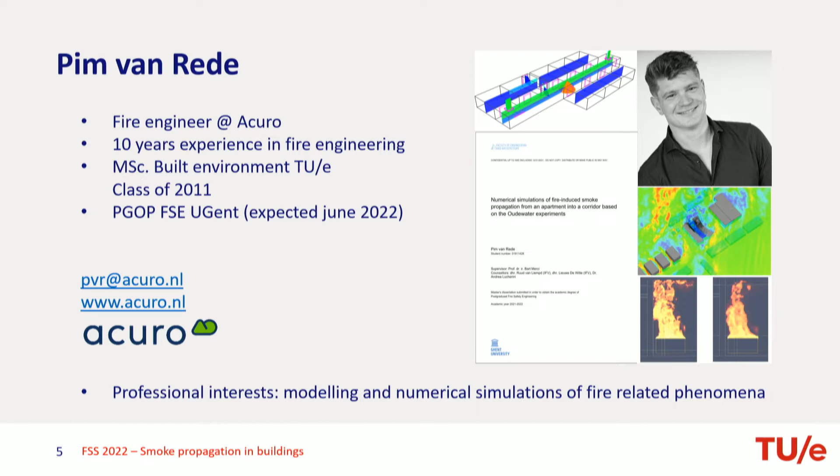Maybe you then, Pim? Yeah, thank you, Ruud. My name is Pim van Rede. I'm a fire engineer at Acuro. Acuro is an engineering company located here in Holland, doing work most notably on fire engineering projects. Well, while we use the layout of the University of Technology, I am not affiliated with the university, other than that I got my master's in the built environment almost 11 years ago.

Currently, I'm finishing the postgraduate program in Ghent with, amongst others, Professor Merci. And Andrea is located somewhere in the back, Andrea Lucherini, you heard him talk yesterday. My thesis is on the numerical simulations of fire-induced smoke propagation, and it uses an experimental data set which was obtained in 2019 by the IFV, now the NIPV, the Fire Institute where we're located right now. My professional interests are the modeling and numerical simulations of fire-related phenomena, and you can contact me at this address.

Well, I think your thesis from the postgraduate course is part of this presentation. Yeah, and you use the same experiments that a student of mine, a master's student, used, also modeling experiments in simulation, but you used CFD simulations, FDS, fire dynamic simulator, and my student used CFAST and B-risk simulations, so zone modeling. And well, Pim said to me, well, zone modeling, that is a kind of generation gap. Because I'm much older, I still believe in zone modeling, and according to Pim, well, we have a discussion about that, I think, later on.

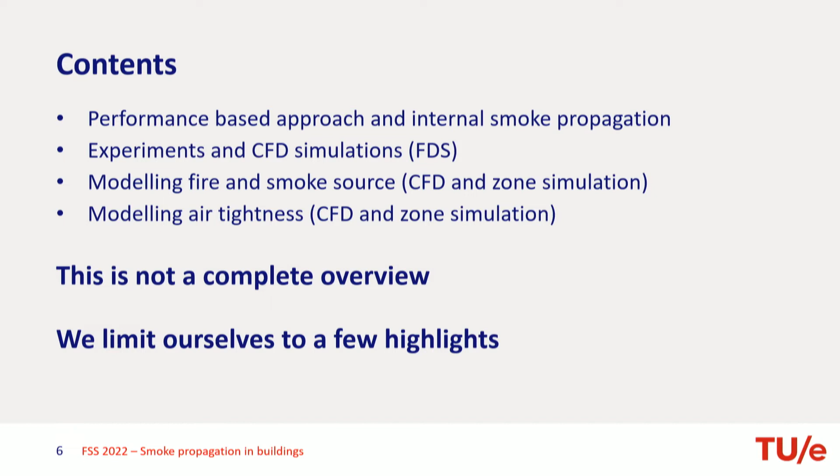So a performance-based approach is always a project-specific approach. That's why if you do a simulation of an experiment, you can fit it for that experiment, but can you also translate that for other configurations? That's always difficult because you are always project-specific.

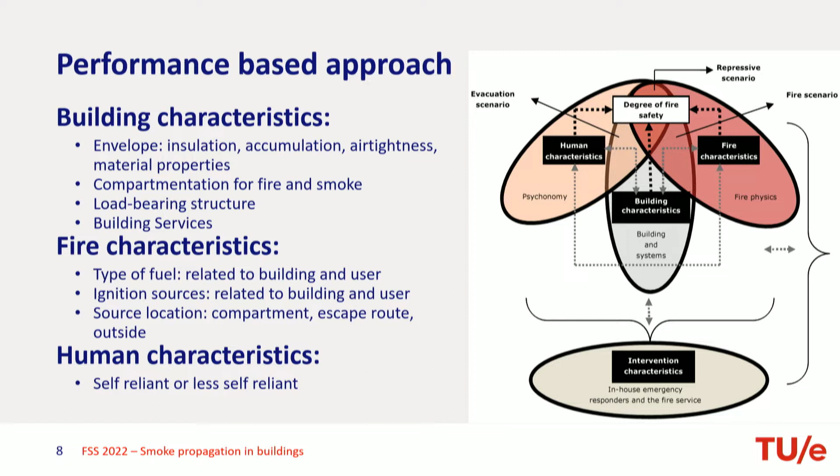Human characteristics are changing nowadays, especially in residential buildings. I think that goes for the whole of Western Europe, but especially in Holland, we have an aging population, and that means that it's not always possible that people evacuate by themselves, although we expect that they do that.

According to the building code, we have an evacuation concept. But does it then really make sense? So that's also an interesting question when you take into account smoke propagation inside buildings.

Main objectives of most building codes have to do with personal safety: safety of the building users, safety of the building assistants, the fire service, and the safety of third-party properties, so the adjacent buildings, adjacent plots. And in all building codes you also find requirements on compartmentation, sometimes on smoke compartmentation, on escape routes, etc., on structural safety.

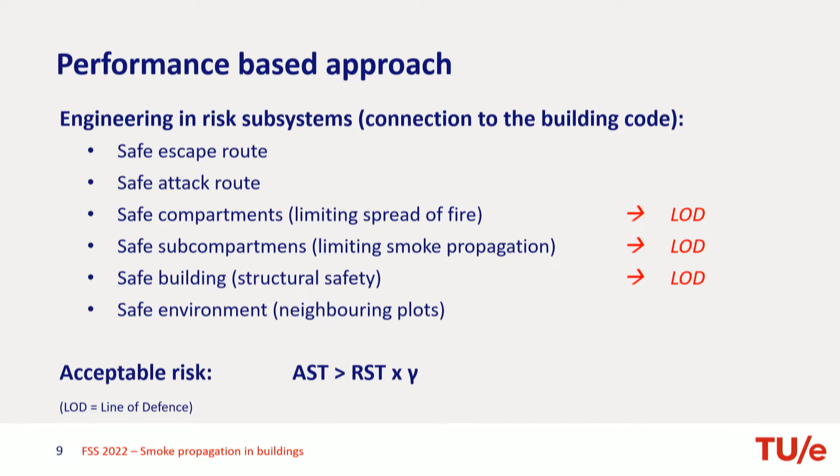So you could think, okay, there's also something about damage control, because we try to limit the maximum fire spread, we try to limit the smoke propagation. That's true, we try to limit that, but it's not - it has nothing to do with damage control. It's just to gain time for the building occupants to act, and to gain time for the fire service to act, to do something.

So none of them is absolutely reliable, but those what I call lines of defense are maybe less reliable than, let's say, the safe escape routes, safe attack routes, and safe environment, which are directly related to the main objectives of the building code.

So in all cases, the acceptable risk you can define as the available safe time has to exceed the required safe time. Sometimes we mean clock time - when it comes to evacuation, we mean clock time, real time. And sometimes it's time according to the standard fire curve, so that's not real time, but it's a kind of thermal load, thermal action.

The larger the interval is, the larger the safety factor is, the more reliable that risk subsystem is. So I like to think in those risk subsystems.

And you see that limiting smoke propagation is also one of the risk subsystems. And I think if you evacuate the building, then after some time, smoke propagation is not an issue anymore. If everyone is out, it's not an issue. But evacuation is the concept of the building code - I think in most countries you can say that that's the concept of the building code.

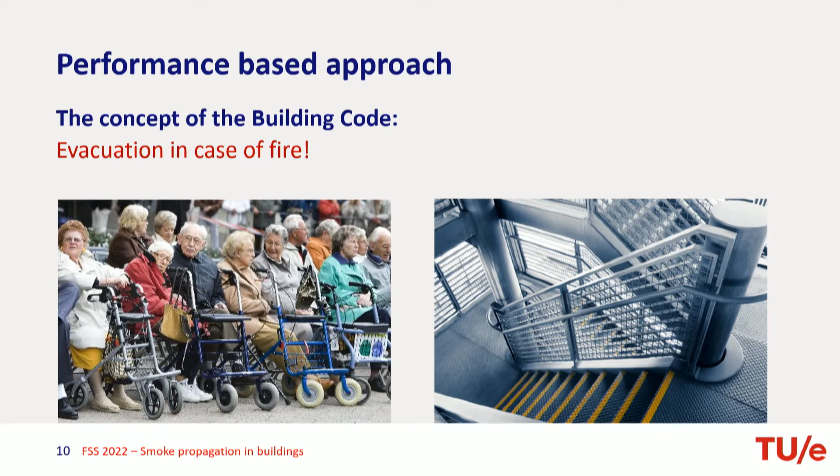But if the left picture represents the building residents, and the right picture is the escape route, it's a kind of misfit. So you have a safe building on paper - according to the building code, it's safe, according to the requirements, it's safe. But in practice, it's not safe because people can't use the evacuation routes.

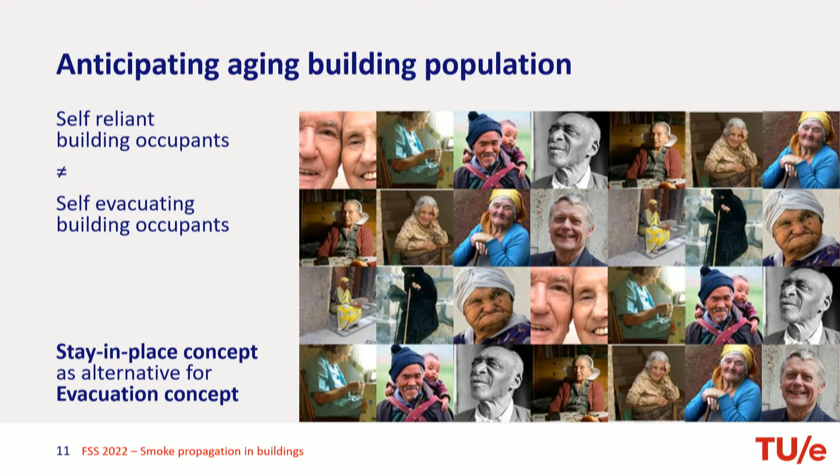So another concept could be: stay in a safe compartment, a stay-in-place concept for non-self-evacuating building occupants. And then smoke propagation becomes even more important, because keeping a safe compartment safe during a whole natural fire - that's really a hard job, a tough job.

So in the evacuation concept, we try to prevent smoke propagation to the escape route - not for the whole natural fire, but let's say 30 minutes or something like that, when everyone is out of the building, it's not important anymore.

And in the stay-in-place concept, then you want to prevent smoke propagation to adjacent compartments, other compartments in the building, but during the whole natural fire. So that might take an hour, might take 90 minutes, something like that.

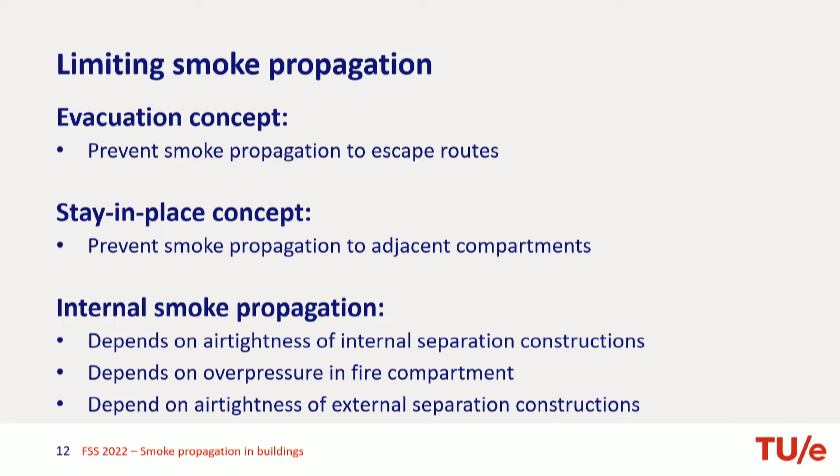And that's very difficult, and also very difficult to predict, because it depends on air tightness, on internal separation constructions, but it also depends on the overpressure in a fire compartment, or a room in a fire compartment. And it also depends on the air tightness of external separation constructions. And the last one, we have requirements on that because of the energy performance of buildings - we need airtight buildings, because if not, they are not energy efficient.

Okay, this is, I think, also not new for you. Evacuation concept: we compare the available safe egress time, ASET, with the required safe egress time, RSET, and a safety factor.

In the stay-in-place concept, you do basically the same, comparing the available safe time with the required safe time, but here the required safe time is the total duration of a natural fire curve, NFC. Because you don't evacuate, people stay in a compartment that is assumed to be safe.

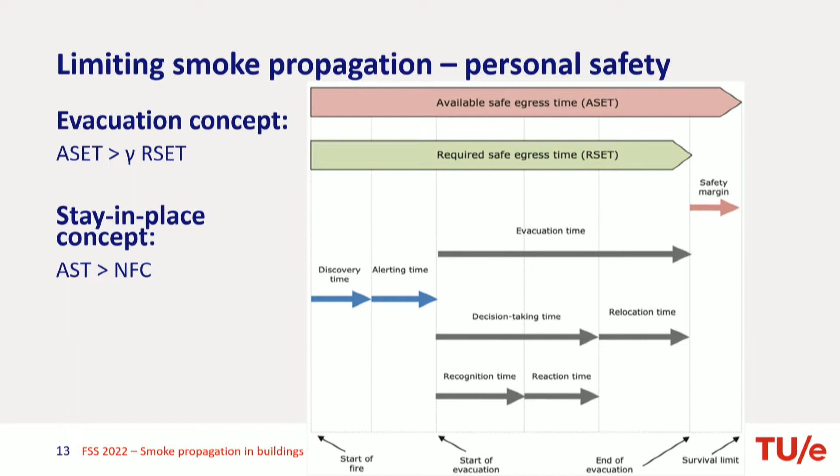It's very difficult to reach, but I think in theory it's a nice concept. And what is safe depends on your assessment criteria, of course.

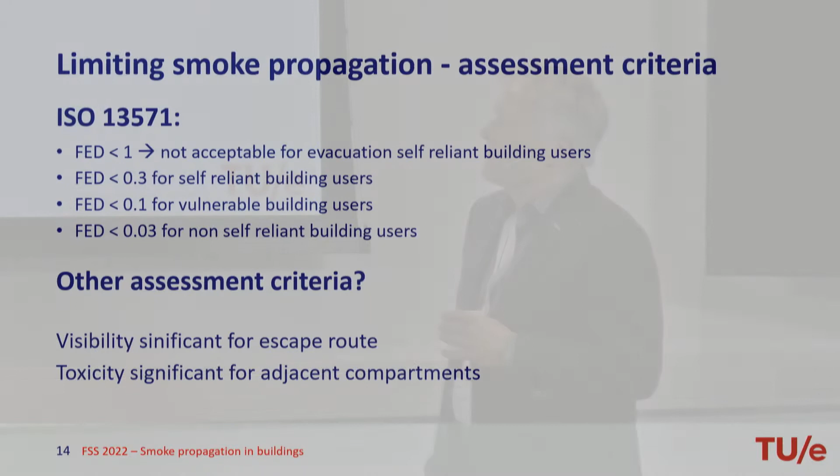You can use several assessment criteria. Here you find ISO 13571, and FED stands for fractional effective dose. There's also fractional effective concentration. A FED value of 1 means that about 50% of the building occupants are not able to move anymore.

So if there is no rescue, then they die. That's never acceptable for an evacuation concept, because people have to move themselves. You have to evacuate yourself.

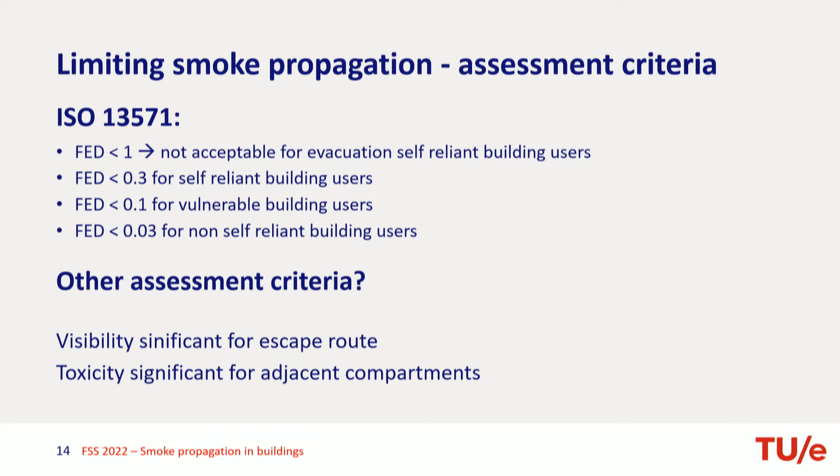So a FED value of 0.3, with a failure probability of about 18%, 0.18, could be more realistic for the evacuation concept.

And if you have vulnerable building users, or vulnerable and non-self-reliant building users, you could be even more strict in your assessment criteria.

In those FED values is toxicity, but also visibility, temperature, everything you think is important, you can fit into those FED values. Visibility is especially important for the escape route.

Toxicity is especially important when you use a stay-in-place concept and want to know if the conditions in adjacent compartments are still acceptable.

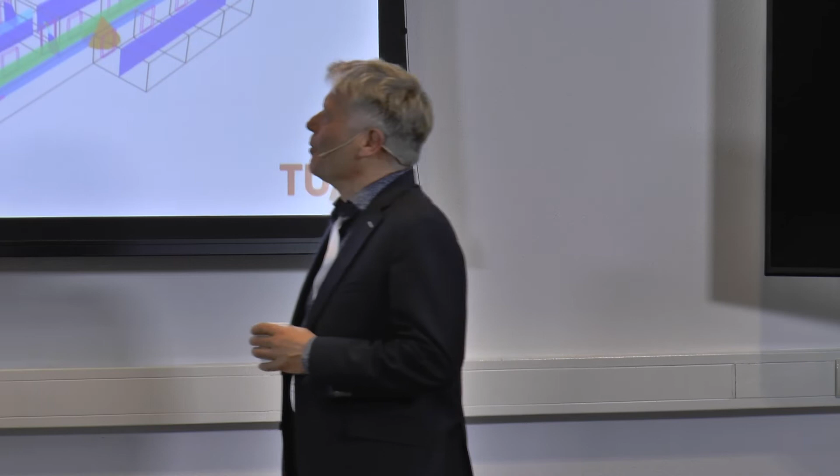This is more difficult to say, but this is 3 layers, and a corridor, and at one side you see also different compartments. So this is how a zone model looks like.

You are modeling connections between the zones, some real openings, doors that can be open, or windows in external separation constructions that can be open.

In both cases here you see where the fire is located. It's a localized fire, so there is no flashover yet. That means that openings in external separation constructions, daylight openings, are assumed to be intact, so there are only a few openings.

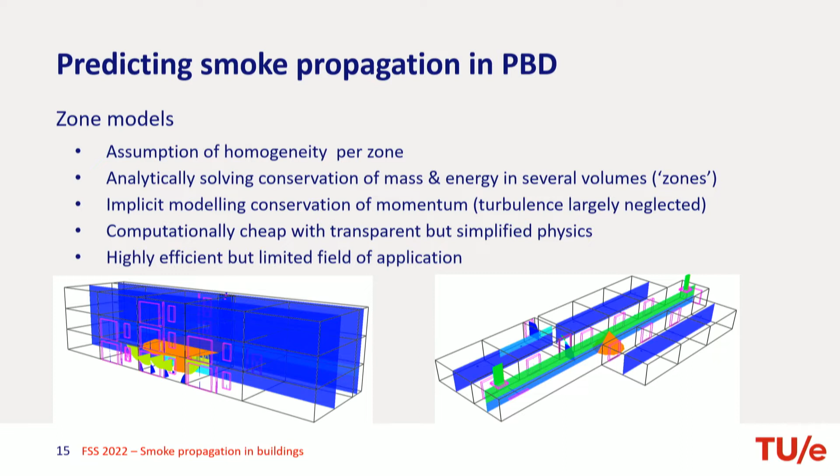Then you can calculate or simulate the smoke spread in that building. Characteristic for zone models is that you assume every zone is uniform, a homogeneous mix of temperature and pollution.

So sometimes you can model one room in two zones, a hot zone and a cold zone underneath. Sometimes it's mixed. If there's very little temperature difference, then maybe it's better to use a mixed situation.

That's a very simple approach. Of course it's not homogeneous, but that's an assumption for calculating average conditions, which could be okay if your zone is not too large.

It's computationally very fast and cheap, and you can perform a sensitivity analysis very easily because calculation times are less than a minute. You can wait for the answer. So from that perspective it's very efficient, but it has a limited field of application.

So one step more advanced is field modeling, computational fluid dynamics, CFD. Here you see a short clip, and you see this is more dynamic.

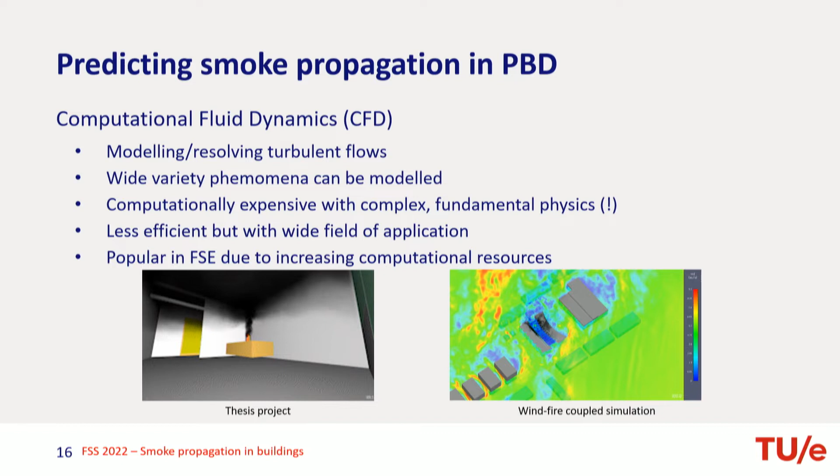This is more advanced, more accurate, and it has gained popularity due to increasing computational resources. Less efficient, meaning you need more calculation time, and performing a sensitivity analysis with CFD is almost impossible. But it has a wide field of application.

Then we have two statements that I started with. It looks like a generation gap, but in my opinion it's still possible to use zone models instead of CFD models. You could say it's better to use zone models because you need fewer boundary conditions and therefore fewer uncertainties.

So maybe a simple model is more reliable than an advanced model where you need a lot of boundary conditions with a lot of uncertainties. Results of a simple model are therefore less detailed but more reliable. That's nice - it's a statement, but I don't know if it's true. It could be true, could be wrong.

It's not my personal opinion, but to get the discussion going: using more complex methods such as CFD, computational fluid dynamics, should be generally favored over more simple zone models, as the latter simplifies some important aspects of fire-driven flows in a crude and generalizing manner.

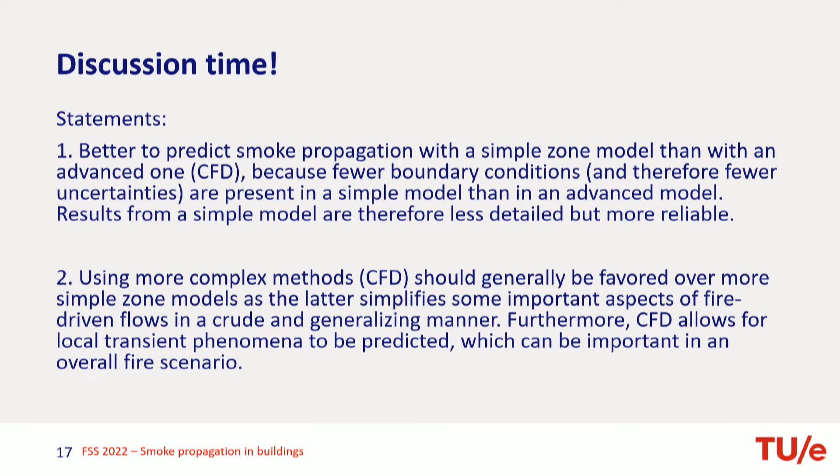What I mean by that is that zone models, as Ruud already mentioned, assume uniformity in the zones, but they also use empiric, semi-empiric plumes, which have some limitations when it comes to applicability. Furthermore, CFD allows for local transient phenomena to be predicted, which can be important in an overall fire scenario.

So, to get the discussion a little bit going, some reactions, come. Andrea. Okay.

Thank you for starting the discussion, but to me this comes with the level of complexity of the problem you want to solve. Because if you are in a box and you have a fire with a certain heat release rate, you don't even have to use a zone model - you can do some hand calculations and understand how much entrainment and how much smoke layer you will get in time.

Then if you have a multi-compartment, that will be important. You can have a zone model, but then it goes into how you have open doors, leakages, and all the different models have different assumptions. So to me, it's always important to understand the complexity of your problem, and then based on that you can use certain tools.

Well, the problem here is smoke propagation inside the building. So we want to know what the smoke pollution is in temperatures, in toxicity, in visibility, in the escape route, and also in adjacent compartments.

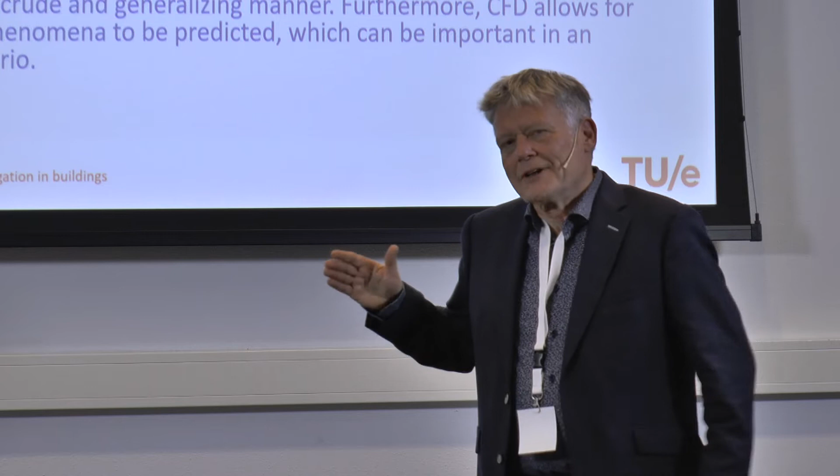Therefore, it's not really needed to have detailed information. It's enough to have the information about one room or one part of the escape route to see if it's safe, if it's possible for humans to remain there or to use the escape route for some time.

I think it's not important to have the exact value at a certain point in the escape route for optical density or toxicity, but that a more average value is good enough for that assessment.

Okay, David. Yeah, I don't think you need fewer boundary conditions in a zone model. I think if you are looking for the same reliability, you need in both cases the same boundary conditions. I cannot think of a case where you have a zone model with fewer boundary conditions. I think with CFD models you can do everything you can do with a zone model, but a CFD model a lot of times is overdone, it's a sort of overshoot.

Overkill, yeah. Another thing is that CFD models - if you are talking about only transient smoke propagation, we know that can be predicted quite reliably. But in CFD packages there's a lot more, like pyrolysis models, that kind of stuff, and that's really beyond a reasonable form of validation. So CFD models also hold a risk that you do things that are not validated in that kind of models.

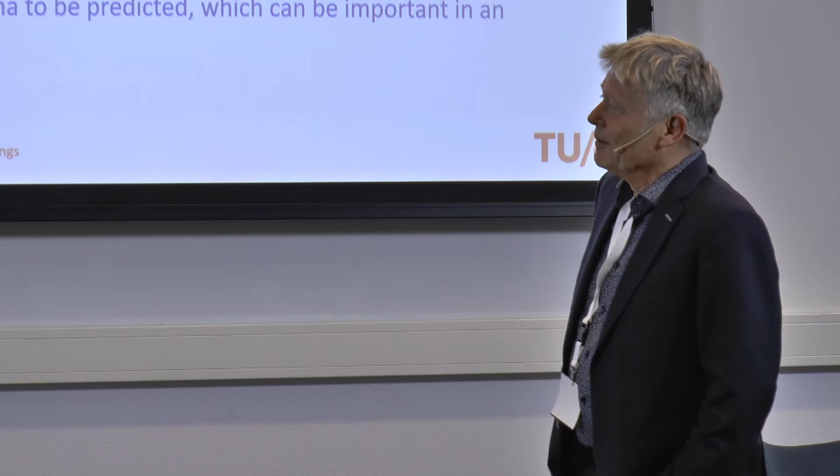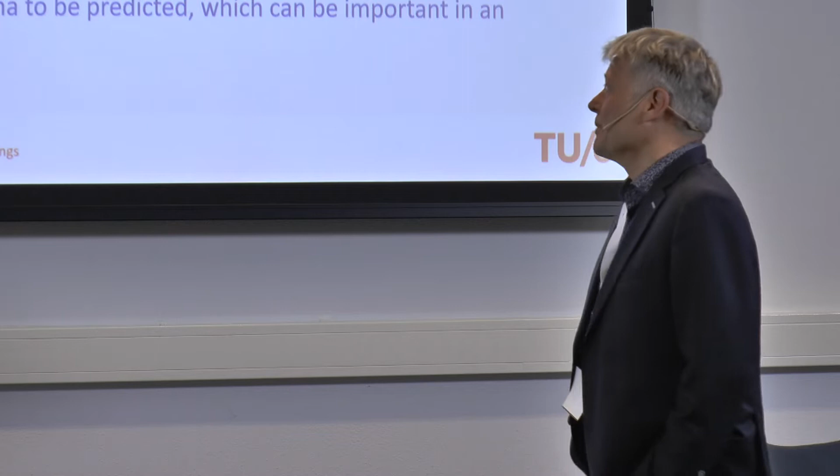Yeah, we come to that. I agree modeling the source is very important because that's where temperature production and smoke production start. And modeling the source in zone modeling is very simple, so that has its limitations. Well, we come to that, because in CFD you could do it in a more advanced way, but very often we don't - also in CFD we do it very simple.

Yes, from my perspective, comparing CFD to zone models on a case-by-case basis is a little unfair because of the amount of resources necessary for both simulations. If you could imagine devoting the same amount of resources you'd use for CFD to zone models instead, you can run 100 or 1,000 simulations in place of one.

And now the question is not really whether a simple answer to one question is better than a detailed answer to one question. It's whether a simple answer to 1,000 questions is better than one answer to one question. And that opens a whole new world of possibilities where zone modeling absolutely shines.

I don't think CFD will reach that point because we seem to complicate our models quicker than computers develop their power. So this is a very bright advantage of zone modeling.

When it comes to case-by-case comparison, the thing you cannot see with zone models is mixing at the boundary of layers. In some cases, like the car parks I presented yesterday, this mixing can be absolutely critical for how the car park fills with smoke. You may remove a lot of smoke from the car park, but one little vortex that spins destroys everything, and you will not see that in a zone model because you're not solving for that interface, just mass transfer between one zone and another.

In all but two experiments, the fire source was composed of a polyurethane-filled two-seater sofa, shown here at the bottom right. It's a shame we don't have a laser pointer here. You can see it's elevated a little bit, standing on a weighing scale.

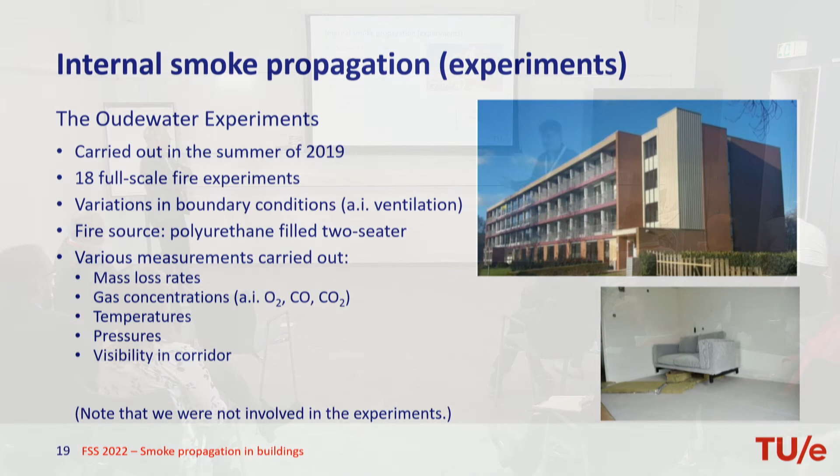During the experiments, the mass loss rate of the sofa was measured, so we have an indication of how much mass actually pyrolyzed. Also, in both the apartment and the adjacent corridor, and in other apartments—though I'm limiting myself to the apartment with the sofa and the corridor—gas concentrations were measured: oxygen, carbon monoxide, and carbon dioxide, for example. Temperatures were measured using thermocouples, pressures were measured, and visibility was measured.

Just a statement: as far as I know, I was not involved in the experiment. So if you have any in-depth questions relating to these experiments, please ask Liebe.

For the CFD study, to go into the setup, what you see here is the floor plan of the floor with the fire seat. You can see the two red blocks there—that was the location of the sofa. In one of the apartments, the sofa was placed and ignited. It was located in a corner; there were reasons to do that, but I'm not going into too much detail there.

During my simulations, I've modeled 3 measurement trees, numbered B1, B6, and B5—one in the apartment and two in the corridor. There were thermocouples, pressure gauges, and also radiative heat flux gauges, though I didn't use them in my CFD study, and visibility meters, so light intensity meters.

I set up and studied 3 cases, all with a varying level of ventilation. The first had the balcony door open—at the top you can see the window frame which had a door in it, open during the experiment. In the other two, that door was closed. In all experiments, the door between the apartment and corridor was opened 300 seconds, so 5 minutes, into the experiment. In case study 2, it was kept open; in case study 3, it was closed later on.

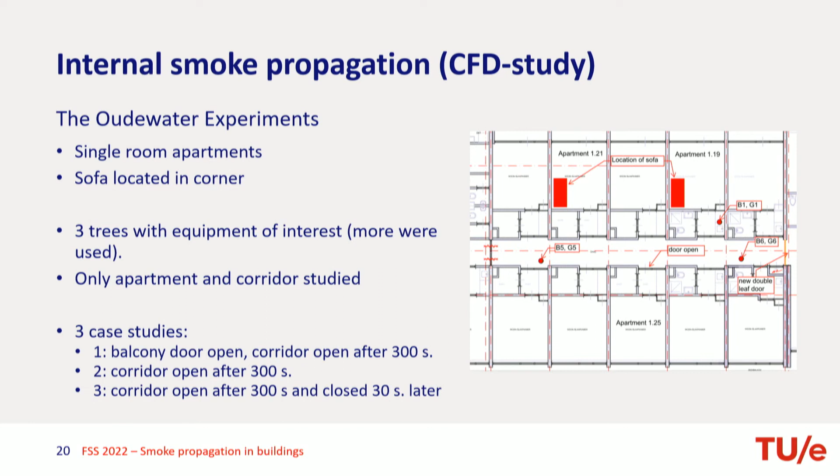So if you have any questions, please do ask them. Yeah, Peter—other openings, ventilation?

What they actually did is measure the tightness of the apartment prior to the experiment, so they did a blower door test, giving an indication of the airtightness of the enclosure. It was on the order of magnitude of 200 centimeters squared, overall, meaning interior and exterior construction together. The ventilation shafts or systems were opened during the experiments, so they're included in that leakage area. There were no firewalls in the ventilation system—it's an old apartment building, just a shaft with natural ventilation.

So for my simulations, Ruud already mentioned it. I used a fire dynamics simulator, a CFD tool by NIST. Andrea used the same software, so I'm not going into too much detail there.

The heat release rate of the sofa, I actually derived that from the mass loss rates, which were measured during the experiment, and I multiplied that with the effective heat of combustion. Now, one important thing is that they did not carry out calorimetry, so we do not have a real good value for that effective heat of combustion. Typically for polyurethane foam, we can expect somewhere between 16 and 25 megajoules per kilogram, depending on the combustion efficiency and the chemical composition of that fuel.

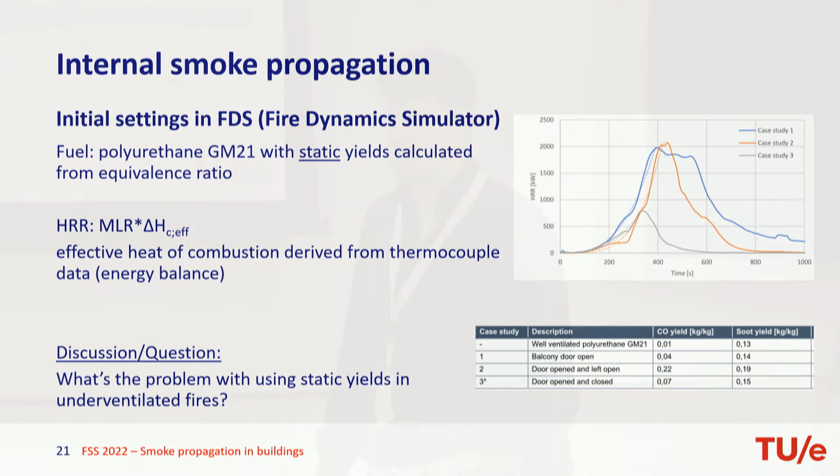Using the oxygen measurements in the apartment, I was actually able to calculate or approximate some form of equivalence ratio, which says something about the level of underventilation. It's the ratio between how much air you need for combustion and how much air there is. And I calculated some yields which are imposed in a static manner in FDS.

And my question to you is, when we're dealing with underventilated fires, what is the main issue with using static yields?

Static species yields for CO, for soot, anyone? They're not static. Yeah, absolutely. They're transient. At the moment a fire becomes underventilated, we start to see a very exponential increase in both soot and CO generation. Also HCN, so yeah, I think all products of incomplete combustion, they showcase a very exponential increase.

So this is one of the main challenges in FDS. But not only in CFD, it's the same issue, the same problem in zone simulations. Also in CFAST you can prescribe a soot yield and a CO yield per time step or something. Yeah, that's possible, but that's also very rudimentary and very tricky. So this is one of the main drawbacks of using FDS or any CFD package, as far as I know, in the simulation of underventilated fire conditions.

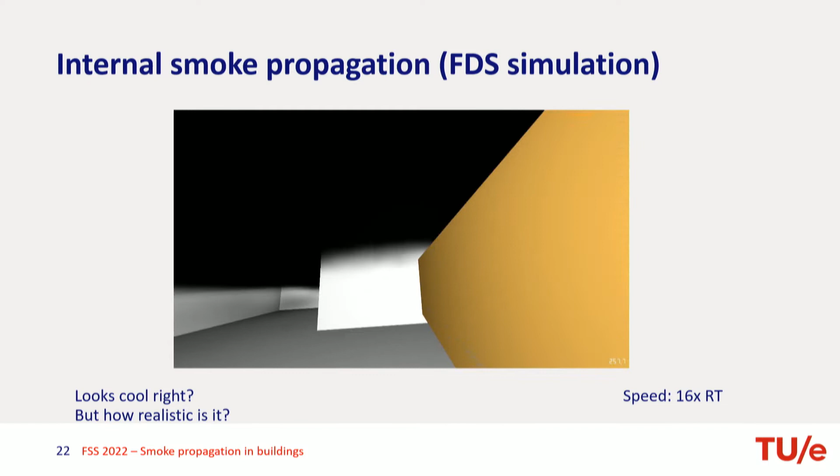So you can see the smoke plume, the fire plume. You can see already there it is. It's 16 times real time. It's entraining its own combustion products. There you have smoke leaking, and after a while, the entire corridor is flooded with smoke.

Now that looks cool and all, but how realistic is it? That's one of the main things Peter was talking about. Is it fit for purpose? If you compare them with existing film materials from tests, well, I'll show later on.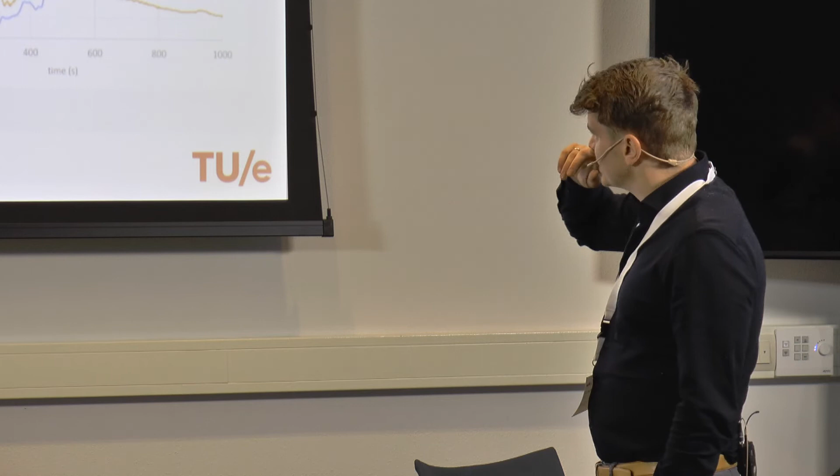That extinction phenomena is predicted quite well by FDS in this situation. So it's case study 1 with the balcony door open, quite well ventilated. For CO, we can see that while the differences are quite pronounced, it's in the order of magnitude of at least 1000 ppm in the initial stages. But taking into account the fact that I had to impose a static yield in FDS, this is a quite nice fit, right?

Now, when we move into- yeah? The sheet before, the blue line, yeah. And the red, the blue line is the experimental results? Yeah, it's then the wrong description. Yes, you know what it means. Yes, yeah, okay, but oh yeah, FDS, yeah, yeah, oh yeah. Oh, there you have, yeah, you mean experiment. I copied this out of my thesis, so there you have the first.

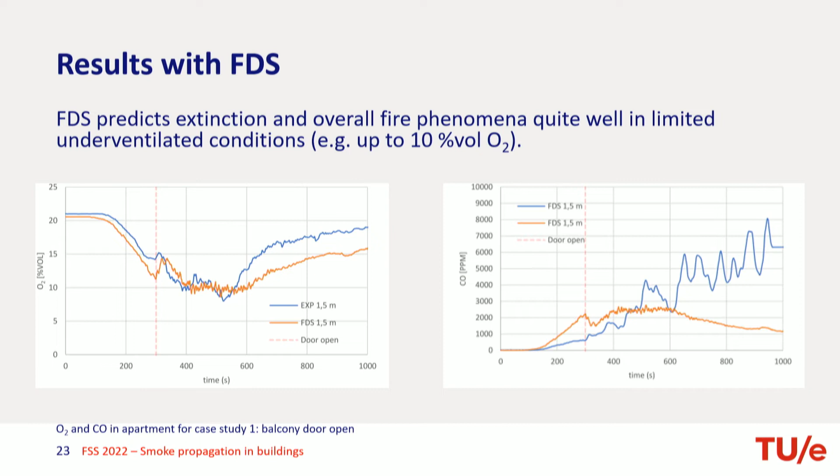Now, when we move into a fire that's even further diluted of oxygen, we can see that FDS really starts to have trouble. FDS only reaches 10 volume percent oxygen in its simulations, while in reality, during the experiments, values down to 2 to 3% were measured. So that's a very hypoxic environment, very, very hypoxic. You're not going to have a nice time when you're walking there.

So for CO, once more, static values, static yields. What we see is that FDS initially severely overestimates CO yields. So when we do a tenability study using those static yields, we're going to be very conservative, maybe over-conservative, and make over-investments. But that's a discussion for another time.

Afterwards, we can see that as the yields tend to increase exponentially in reality, FDS underpredicts everything. In this case, the culprits are the static chemistry, which I talked about earlier, but also the extinction model. The two graphs are more or less related to each other. The underestimation there corresponds to the overestimation in the other diagram.

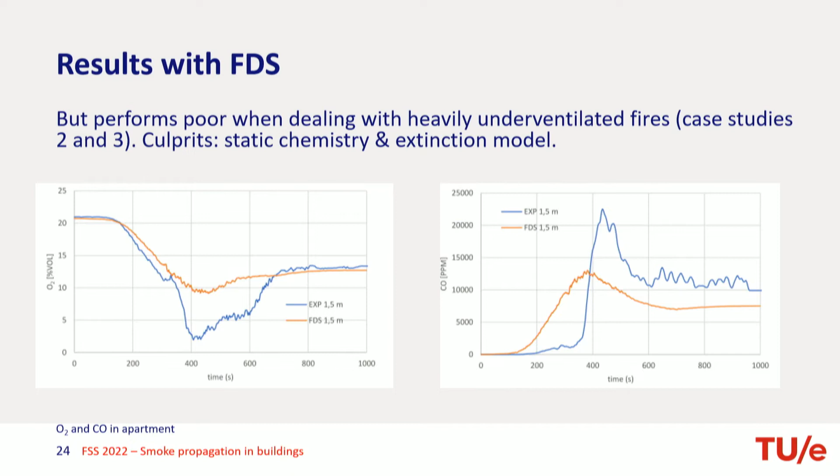A little bit of theory about flame extinction. It's an active field of research - flame extinction as a result of, for example, introduction of a suppression agent like CO2 or water vapor, but also as a result of oxygen dilution. As far as I'm aware, and I'm not an academic, not one perfect model exists currently. So it's all empiric.

In FDS, we use the critical flame temperature concept. It uses two parameters: the lower oxygen limit and the critical flame temperature, or adiabatic flame temperature - depends on what name you prefer. That concept relies heavily on the cell temperature.

Not to be too technical, but in LES, which is a method used for CFD, also used by FDS, the cell temperature depends very highly on the used mesh resolution. So to effectively use this model, the critical flame temperature, we need to use a quite highly resolved mesh, a very dense mesh.

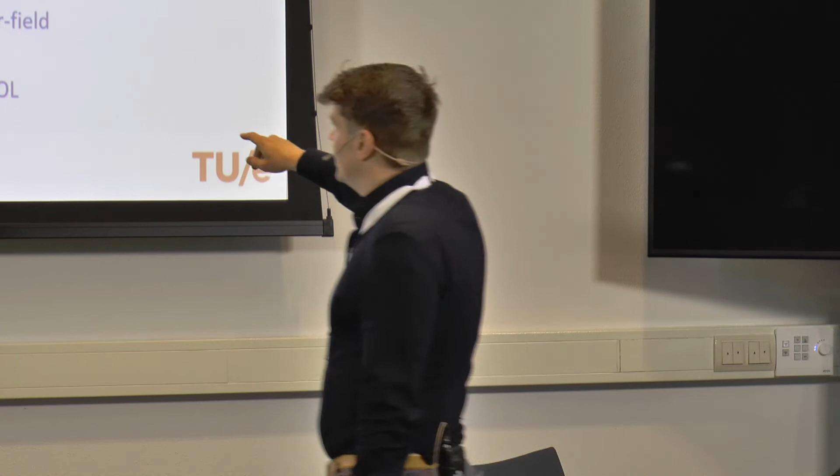You can see here that on the left side, I've used a mesh of 2.5 centimeters, which is already very, very low when we're talking engineering studies. It is composed of a total of 9 million cells. It took more than a week to run 400 seconds on 100 cores, so that's not practical. On the right-hand side, you can see 5 by 5 by 5, 2.7 million cells.

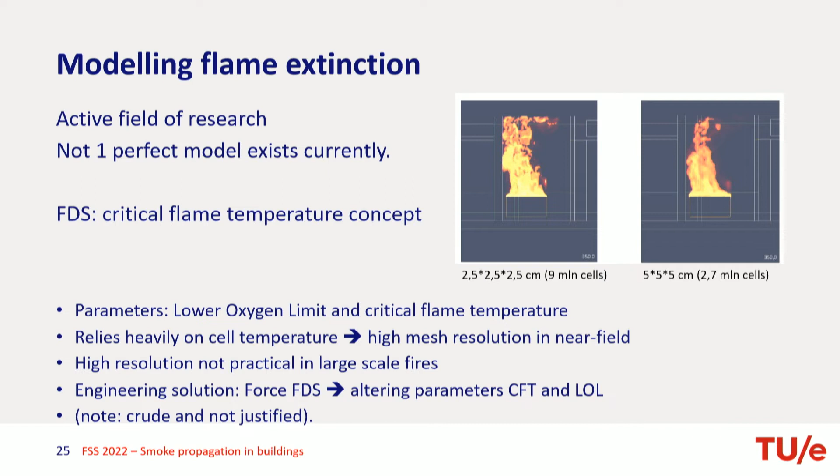But you can see the difference in the flame. It's not only more beautiful, as you called it when we talked on Teams - it's more resolved. It looks better, but the heat release rate that's predicted is also quite a bit higher with the model used here.

Yeah, but it's also a large eddy simulation, so every moment you have a different flame. Absolutely, so you need to time everything. I don't know if it's really comparable. But actually, if you plot the heat release rate, you can see there's a difference, 100 to 200 kilowatts, so that's quite a big difference.

Now, what I mentioned earlier, when I'm running my simulations for my thesis, running them for 1 week on 100 cores, that's just not practical. That's hell. So what I did, more of an engineering solution, I forced FDS to give me the right results by lowering the lower oxygen limit and the critical flame temperature. This is crude, very crude, and not justified, so keep that in mind.

As I mentioned earlier, I lowered the critical flame temperature and the lower oxygen limit, and you can see here in the parametric study what that does with the O2 and the CO. Note that I changed from a static chemistry model to a two-step model, in which first all the fuel reacts with O2 to form CO and soot. Afterwards, in the second step, it reacts again with oxygen to form CO2, should there be enough oxygen available. Now the only variable in this is the oxygen available, and that's very rudimentary and not very justifiable, because chemical kinetics are much more complex than just imposing an oxygen variable. But you can see here that the CO, the carbon monoxide, actually quite nicely follows the green line, which is a lower oxygen limit of 0.08 and a critical flame temperature of 654 degrees centigrade.

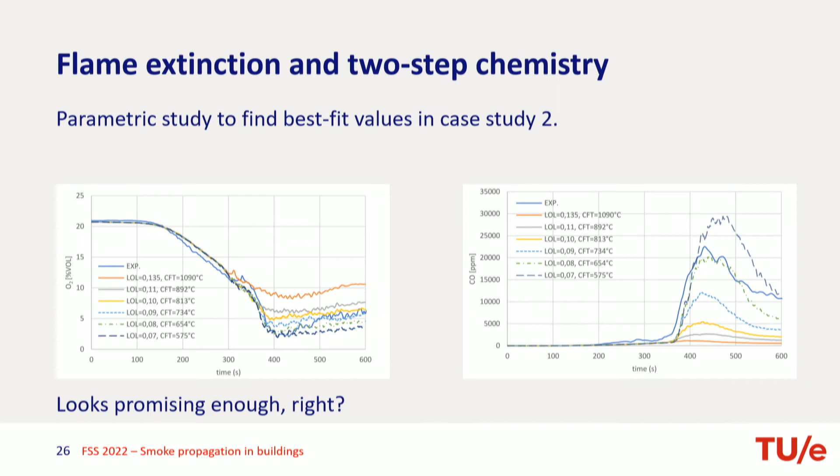So I used this data, these settings, for case study 3, and guess what? No way. So don't hold your breath - the same settings did not yield good results in case study 3. This is an indication that you should be very careful when you use FDS to model and simulate underventilated fires. CO formation is highly complex, and the chemistry more or less dictates the entire simulation - that's the way FDS works, and we currently cannot predict that to a good enough extent. Be very careful.

How does this work with more complex combustibles? It becomes more complex. No, yeah, it doesn't - this is just a simple polyurethane foam. Well, simple - there's nothing simple about polyurethane, but the one-step reaction scheme works quite well, quite clear.

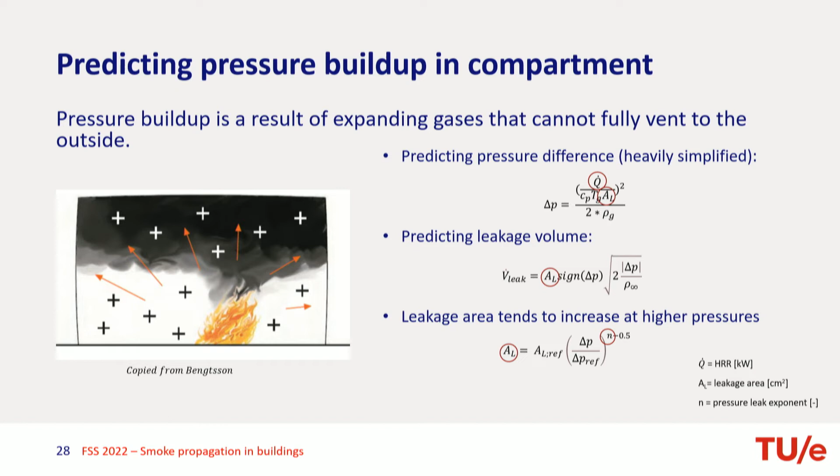That's the heat release rate. The heat release rate is dictating the temperature in the apartment, and by that way, it's also dictating the pressure buildup, because hot air wants to expand, and if it cannot vent away to the outside, it will increase pressure in the apartment. Also, the leakage area, what we talked about earlier with Peter, and the leak pressure exponent N, which you can see here, is typically used to take into account that leakage area starts to increase at higher pressures, because seams and joints tend to open up under higher pressures. So we take that into account by introducing that exponent N.

Sorry, can I ask a question? Sure. That relationship must be valid for one specific type of leakage. Yeah, or if you measure an overall leakage of a total separation construction, you can use that. That was not a measured specific type, but for that room, right? So it's the air tightness of that room that was measured. Yeah, and I believe when you were at Niemann, you or a colleague carried out this experiment, right? Yeah. One of our colleagues. So what they did is they pressurized the room - I don't have to explain how it works, but they overpressured the room and measured the...

If you have a door opening outward, that's not an issue, but that's a different relationship from the same door opening inward. You'd have different leakage. This is not a universal leakage area, but we tend to treat it like that.

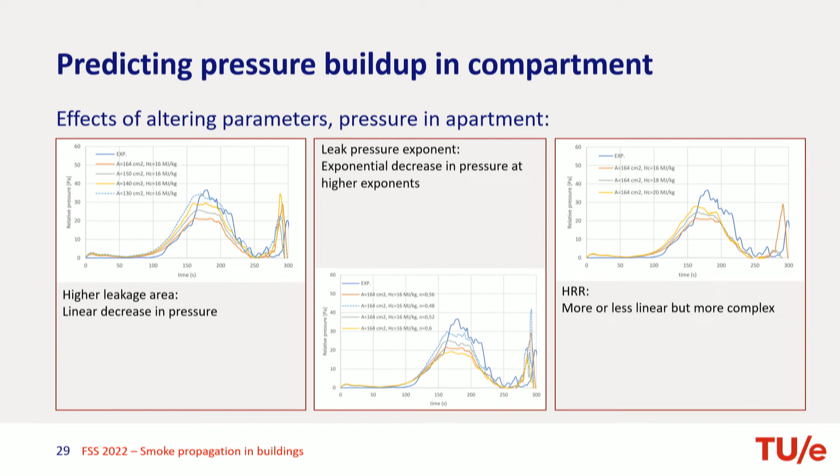Now we have the overall results of pressure which I find in the apartment. You can see that the trends initially are predicted to a well enough extent. Note that the mass loss rates I've used were time averaged, so I averaged away the ups and downs in the measurements. The pressures are predicted quite nicely in the initial time frame.

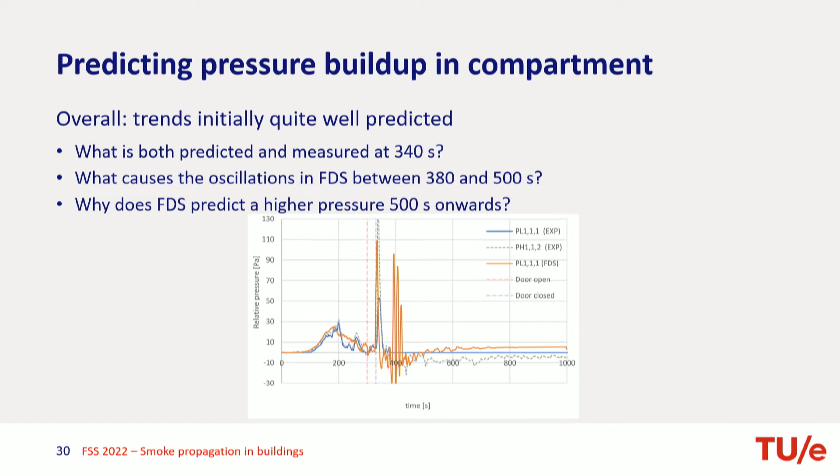At some point, the door towards the corridor is opened and then closed again. Afterwards, we can see this enormous peak, both experimentally and in the dotted line, which is the experimental value. This is also experimental, but using a different measuring equipment, and the orange line is the FDS results.

Can anyone explain why that happens there after that door is closed? Why do we see an instantaneous peak, but also an instantaneous decrease in pressure?

There's a small explosion of gases when you let oxygen in, so the gas is ignited immediately. Indeed, your heat release rate just skyrockets at that moment. But why do we see that sharp decrease afterwards? It's due to the lack of oxygen, actually - it becomes underventilated. This is what we typically see when a fire becomes underventilated: a sharp, instantaneous decrease in pressure.

Now I'm going to skip the other two, they're a little bit more complicated. A little bit more on soot and visibility.

They've also carried out light attenuation measurements, so they've derived the visibility in the corridor during the experiments. And that visibility is depending more on the soot concentration in the corridor.

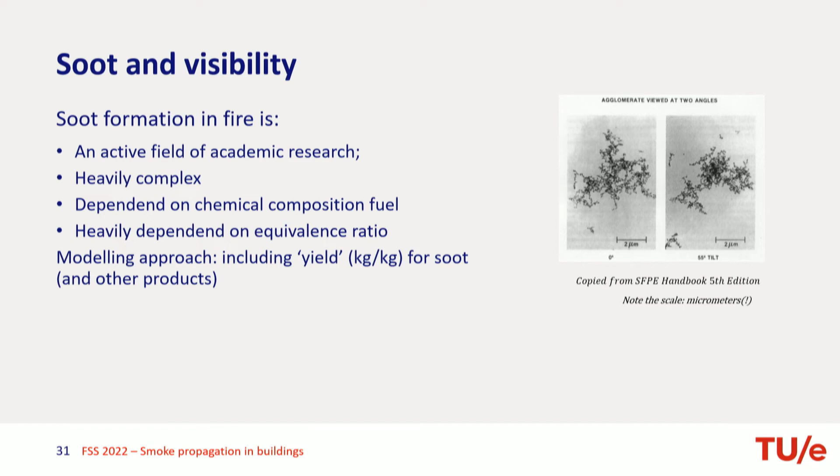It's also heavily dependent on the level of available oxygen. What we typically do in engineering applications is introduce a soot yield, which we also do for CO. That yield is a unit which says something about how much soot is generated per unit mass of fuel.

Yeah, but I think we skipped that - when you finish, I'll show something about air permeability, but how's the time? I think we have to end at 3 o'clock. Let me skip this, I'll let you do this next part - this is not very interesting anyway.

Okay, again, I can show you this picture, which shows the soot propagation in the corridor, side by side - left the experimental value and right the FDS simulation. You can see that it's more or less a nice fit.

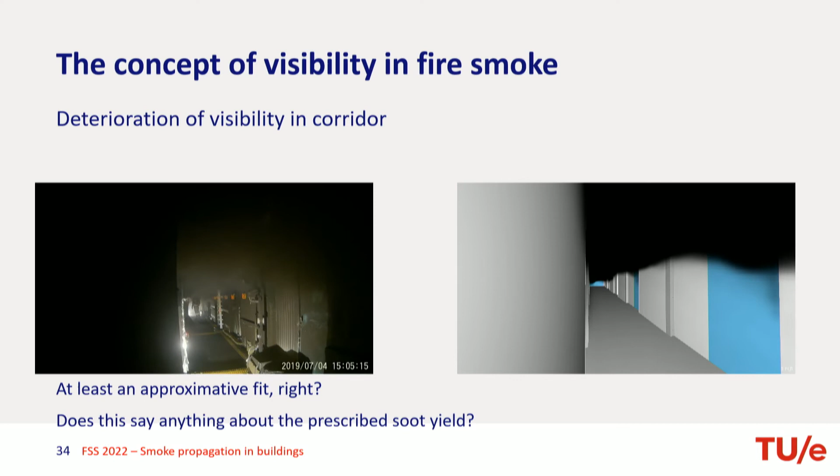Ruud. Yeah, sorry, I took so long.

Well, yeah. I think there is some repetition in my part and your part, but more specific for zone modeling, source modeling is important for internal smoke propagation.

Yeah, I think. Well, maybe a few highlights, and then I want to end with air permeability, because then we can stop at the right time. But this is what you meant with yield.

It's kind of a scalar multiplication factor we put on the rate of heat release, and that's only more or less valid if you have a fuel controlled fire. But if it's ventilation controlled or oxygen controlled, however you want to call it, then that's what you see in this graph.

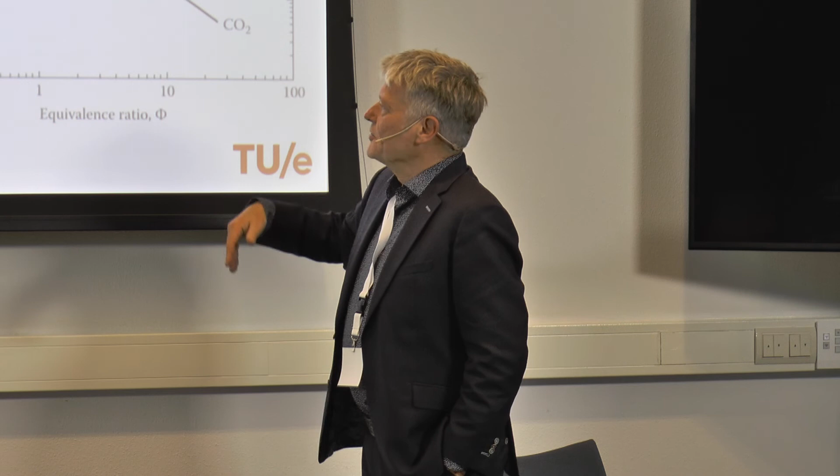Fuel controlled means that it's stoichiometric combustion, so the equivalence ratio is less than 1. If the ratio is increasing, then it becomes an increasingly more oxygen controlled fire, and then you see that the yields are also becoming worse.

So you see soot production, CO production, depending on the fuel, and that's very hard to predict because you don't know exactly in what kind of range you are. So it's always very difficult. That's what you already stressed too, Pim - this is in case of source modeling very difficult when you have an underventilated or oxygen-controlled fire. You don't know exactly in what ratio you are.

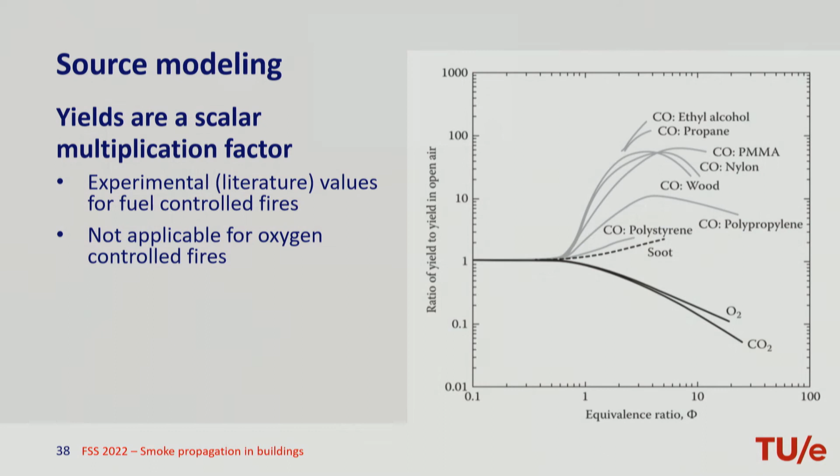But also when we're dealing with sprinklered fires, the sprinklered fire is the same issue. That's also problematic. Okay, so that is a kind of explanation, more explanation on that.

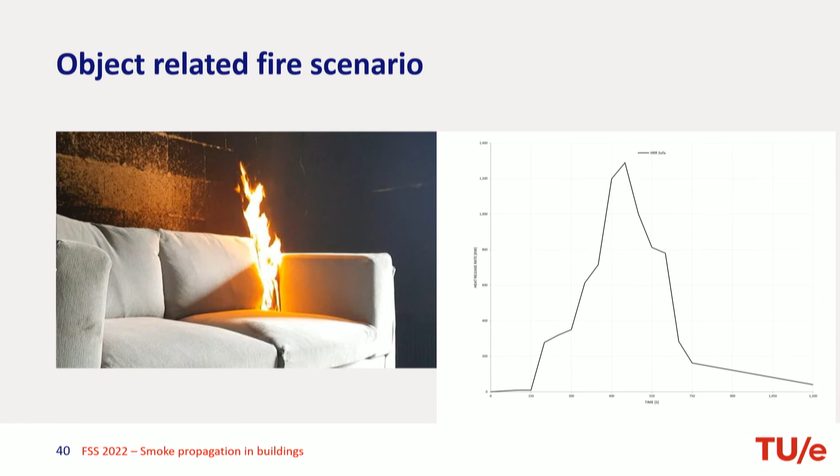Maybe I'll mention some results of my master student, Mark Scholman. He used the same experimental research as Pim used, but modeled that in B-risk and CFast - the same fire scenario, in a two-seat sofa.

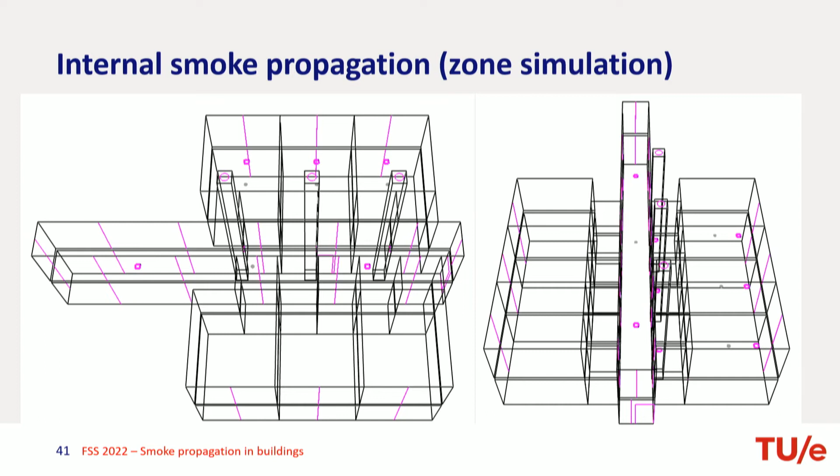This was his model: two levels, a corridor with adjacent compartments, no internal separation construction in the compartment. So one compartment, one room is total free open area. So that's maybe not quite realistic, but that was his way of modeling.

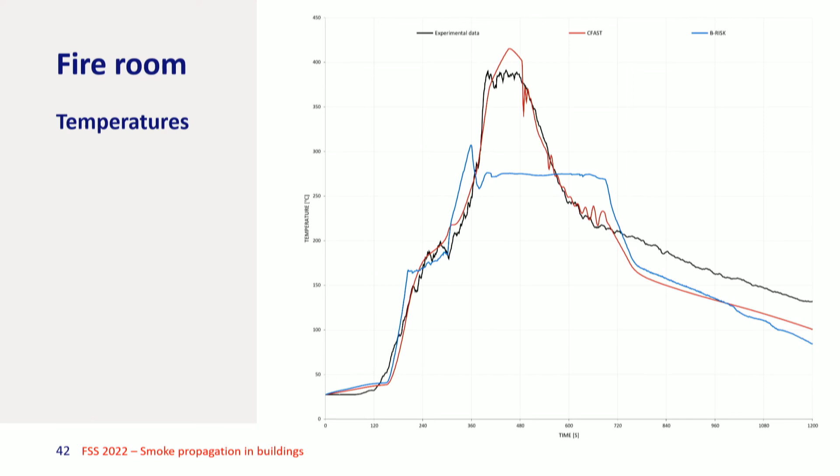And you see here the temperatures in the fire room, and the same goes for the temperatures in the corridor, that there is a better fit with CFAST to the experimental data than with B-risk. And that's typical - that's a bit strange, because in fact it's more or less the same model.

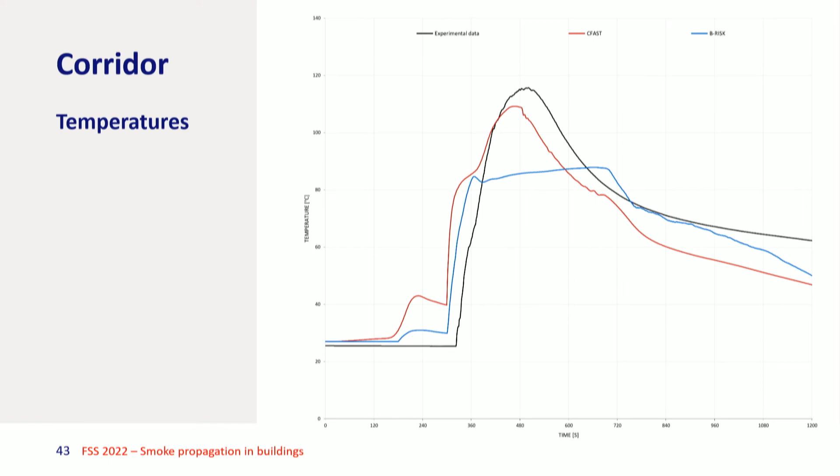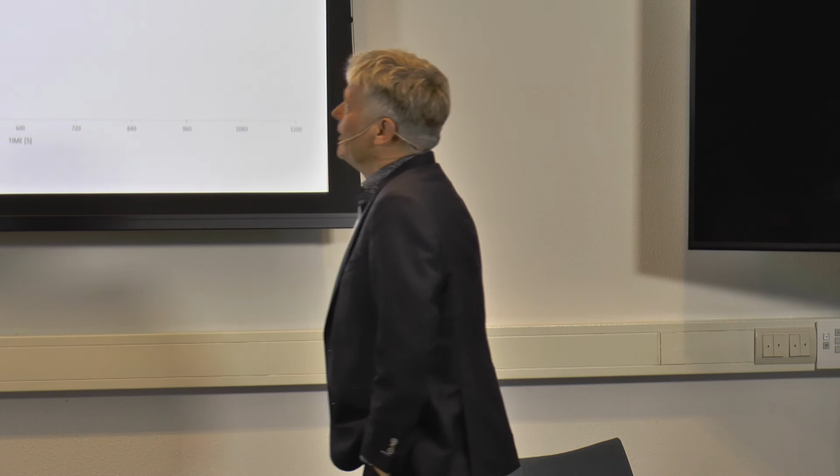There is one large difference, I think, between B-risk and CFAST: CFAST uses a fixed lower oxygen limit, so you can give that as a 10% value or a 15% value, whatever you think is realistic. In B-risk, it's like in FDS - it's temperature dependent, generating its own lower oxygen limit depending on the temperature. I'm not sure if that's really correct. Well, maybe I can't say that because I don't have enough insight into B-risk.

But wouldn't you expect, if that's the case - if it's temperature dependent - wouldn't you expect B-risk to yield an ultimately higher heat release rate than CFAST? Yeah, I don't know, because that depends on whether the lower oxygen limit is related to the upper zone temperature or the lower zone temperature. I don't know. Or is it another temperature specifically close to the fire source?

At some point, you don't have any zones left. No, it's because it's in the fire and the plume. CFAST has a corridor submodel - yeah, absolutely, that's developed from FDS simulation. I don't think B-risk has the exact same corridor model, so B-risk may treat the corridor as one uniform zone, whereas CFAST could do something more - like a revised ceiling jet? No, even further, because it's based on CFD simulations. It's kind of a weird model, actually.

Okay, so you see also oxygen concentration in this case in the corridor. I didn't use all of it, but some graphs from the report from Mark. This is the black line, experimental data. This is CFAST and this is B-risk.

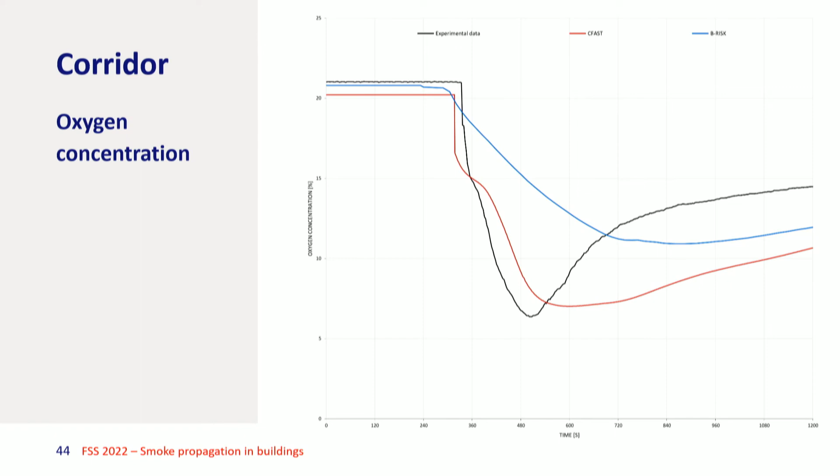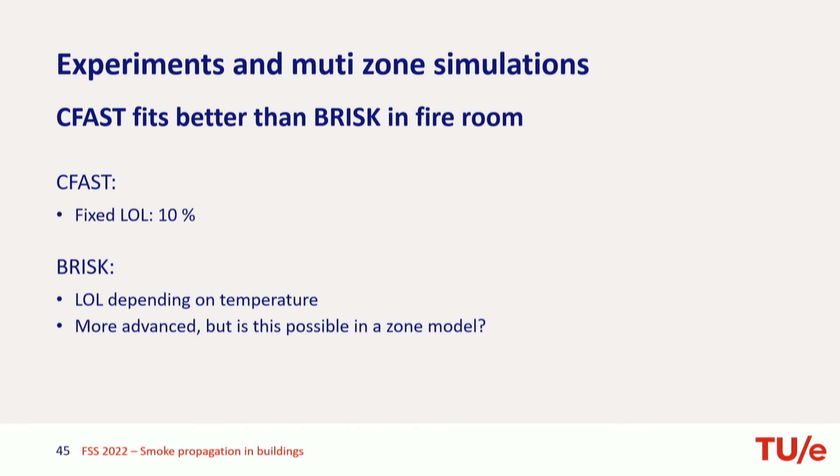So this was my question: BRISK has a lower oxygen limit depending on temperature, but that looks more advanced, and I think in FDS that's the right way to do it. But how do you do that in a zone model? For me that's not clear. I didn't go very deep into this question, but I'm very curious about how that is done in BRISK.

I'm not sure - not many of you are experienced in BRISK, I think, more in CFAST. Yeah, because it runs on my computer, CFAST doesn't. You need to change the settings to United States.

You already talked about the flame extinction model, and this is basically the model in FDS, Fire Dynamics Simulator. So that's a temperature-dependent model for burn and no-burn situations, depending on temperature and the mass fraction of oxygen. It would be nice if you could incorporate that into a zone model, but for me it's curious how you could do that.

We have 5 minutes, I think. So okay, well, no, just well, I skipped some.

The problem with both zone modeling and FDS modeling is, let's say you have different rooms that you are connecting to each other, sometimes with real openings - if a door opens or a window is open, then you know the opening area. If you have a ventilation opening, you know the opening area, that's not a problem. The problem is the air leakage in joints, connections, seams, etc. - the very small openings where you also have a different pressure exponent. The volume flow, that's the upper equation, Q or V with a dot, depends on the pressure difference, and the pressure exponent is between 0.5 and 1.0.

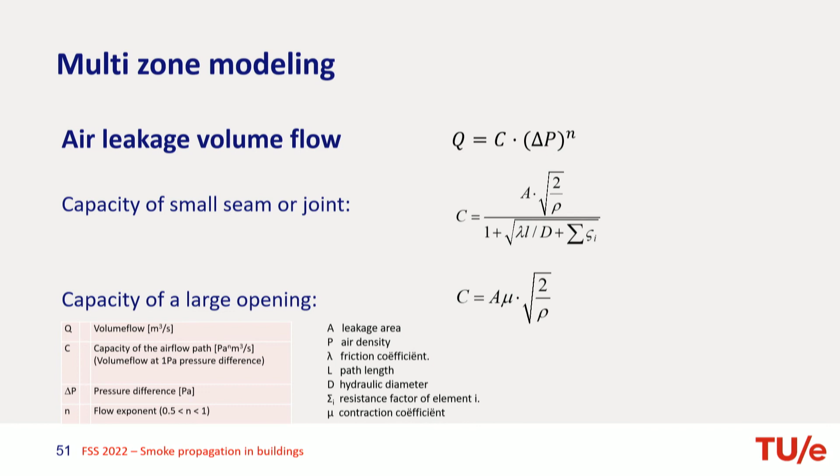For large openings, it's 0.5, so it's the square root of the pressure difference, and then you calculate the volume flow. If you have very small openings, it becomes more or less laminar flow, meaning the pressure exponent is between 0.5 and 1.0. What we do is translate that into an equivalent opening area - that's what we do, I think, both in FDS and in zone modeling.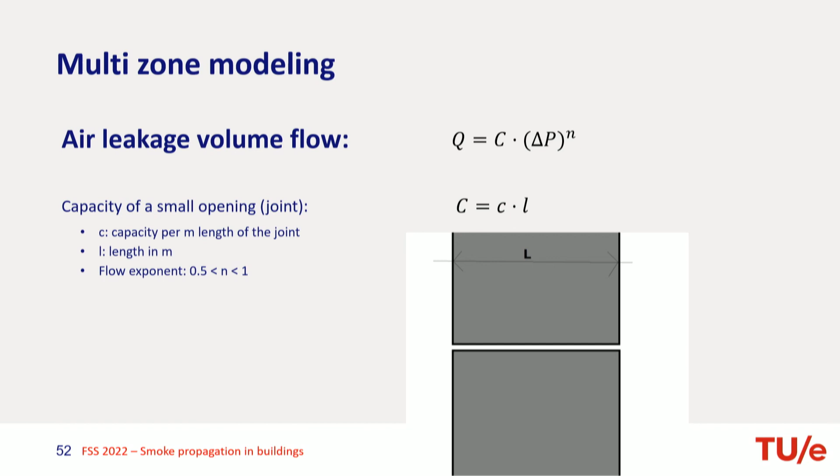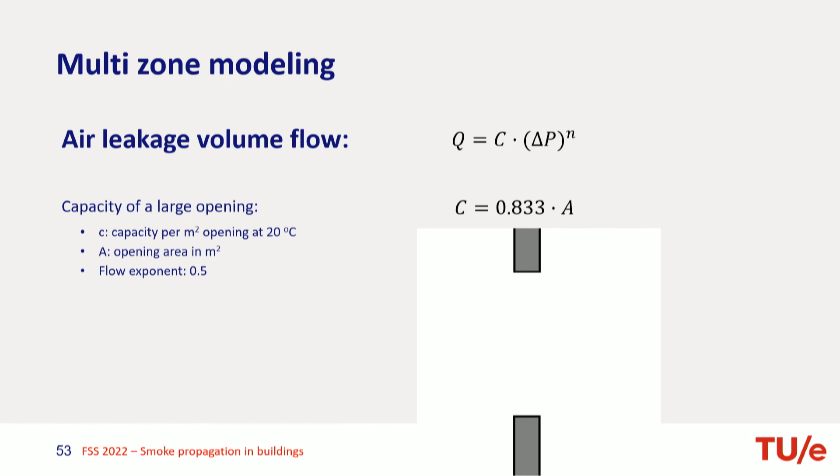So this is, for instance, a very small opening. If you want to model that right in FDS, you need a very fine mesh, which is almost impossible I think. Also, you have a flow exponent that's between 0.5 and 1. The problem with zone models is that you can only calculate large openings, meaning per definition a flow exponent of 0.5 - so a translation into equivalent opening area for large openings, with a fixed flow exponent of 0.5 because it's a large opening.

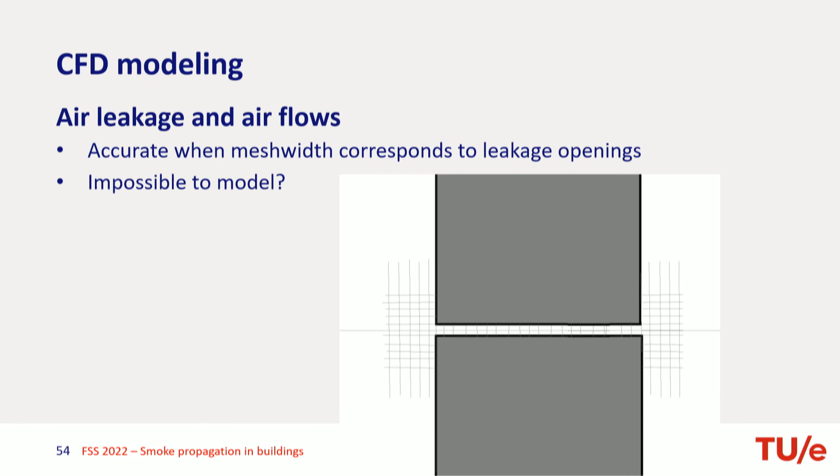The difficulty with modeling in FDS is that if you do it the right way, you need a very fine mesh, and here you have a larger mesh width, so that is difficult to model - it's almost impossible. You'd need millimeter-size mesh, and that's no way to do it, but that's what you'd need for those openings.

So what we do in practice, as we also did in the experiment in Oudewater, is measure the total leakage of the external separation construction, the leakage of the building in total. That's what we need to do for energy efficiency of the building - we need to know what the air leakage of the external separation construction is, so we have measurement methods to do that. But then still we don't know what the internal leakage is. What we also can do is just measure a whole compartment, an apartment inside the building.

So then we know the air leakage of the external separation construction. We know the air leakage of the apartment as a whole. That's partly external, partly internal.

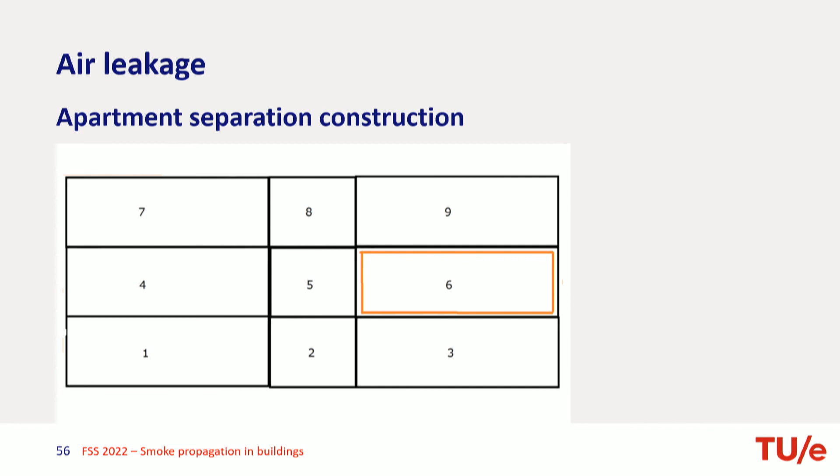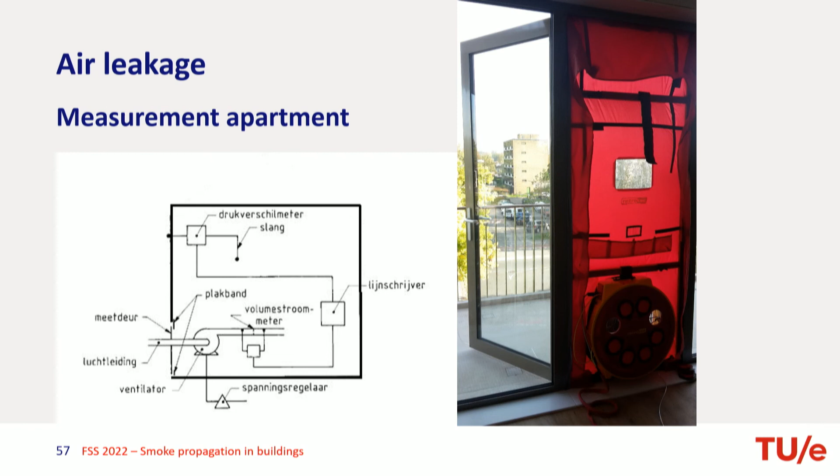Well, if you do that for a building as a whole, you have the external separation construction leakage. I only have one project where we did that in a proper way. That's a building in Hilversum, already several years ago. And you do that for one apartment.

And you can also have an idea about the air permeability or air leakage of the internal separation constructions. But that's the total internal separation construction - so floors, walls, walls to adjacent compartments, walls to the escape route, all together.

You see that here we define that as a volume flow at 10 Pascal. That's the QV10. And then you see that the exponent here is not 0.5, but in this case 0.645. And for external separation construction here it's 0.8.

So it's different, and that means that if you translate that into an equivalent air leakage area, it depends on what your reference level is for pressure difference. Is it acceptable to do that at 10 Pascals, or maybe we need to do that at 20, or at 1, or at 50 Pascals?

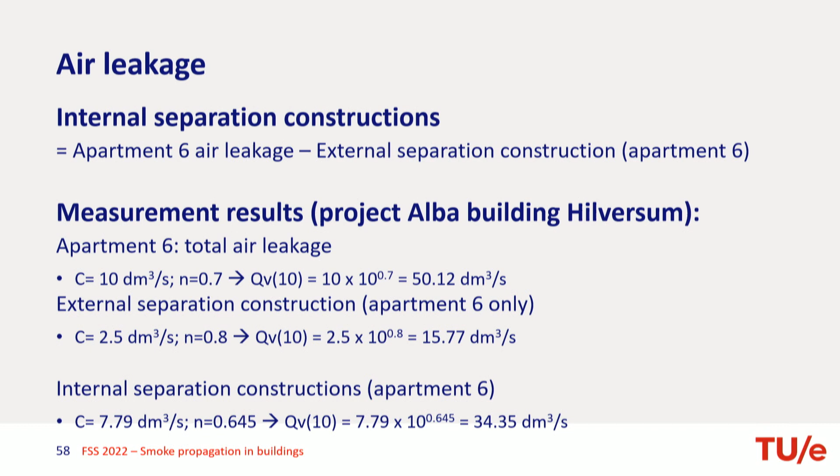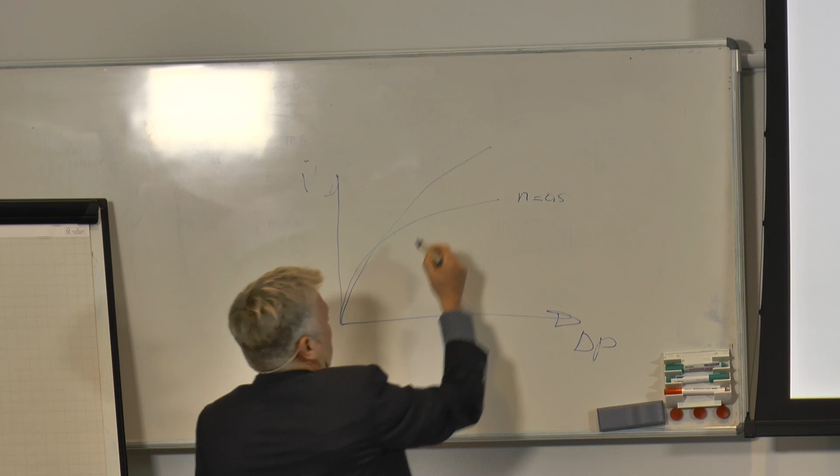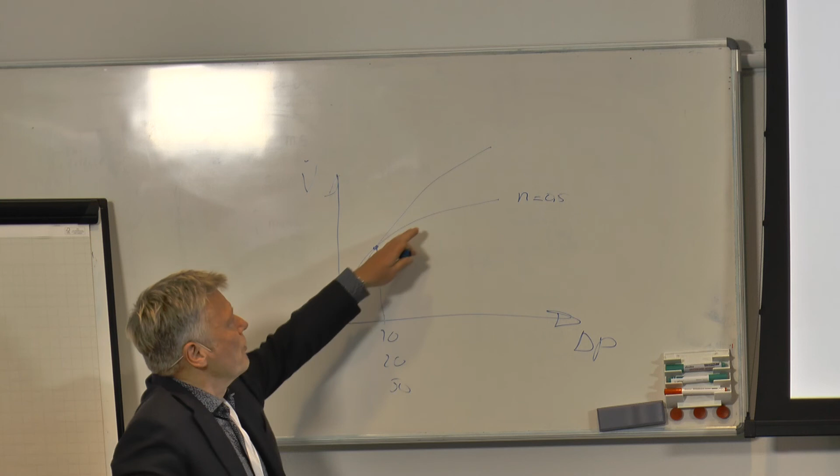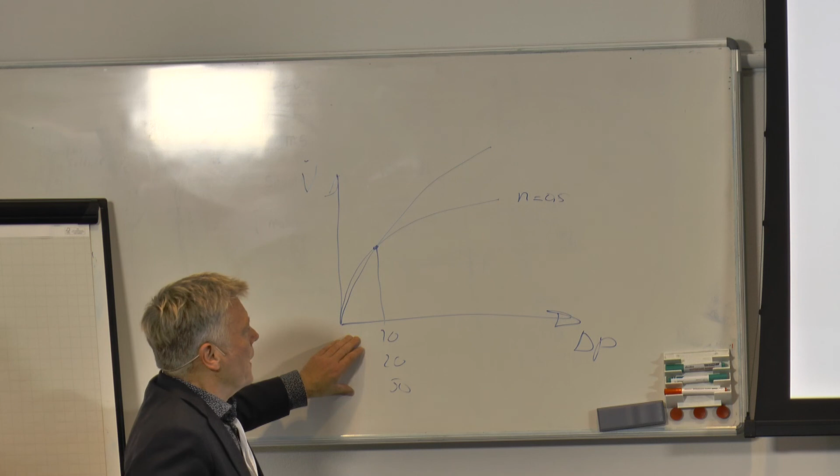So it makes it different if you define your air leakage opening at 1 Pascal, or at 10, or at 20, or at 50. That means you have an underestimation of your air leakage at higher pressure differences and an overestimation at lower pressure differences. So, yeah, how can we fix that?

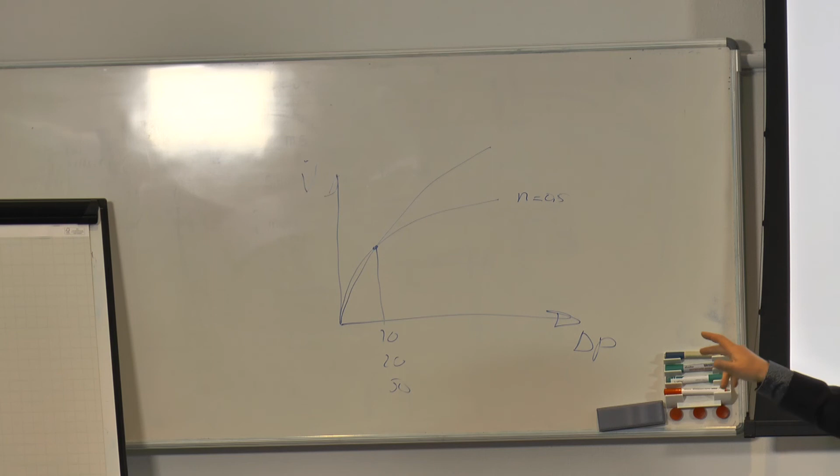Or should we, yes, maybe create stepwise a kind of input file with an air leakage area depending on the pressure difference on the separation construction - maybe that will be the nice thing. So I believe we need to. Yeah, I think we have to.

But here you see that it really makes a large difference if you do that at 1 Pascal, 5 Pascals, 10, 50, or 100 Pascals. So you see that the equivalent leakage area really depends on the pressure difference.

I'll stop right now then. Okay.

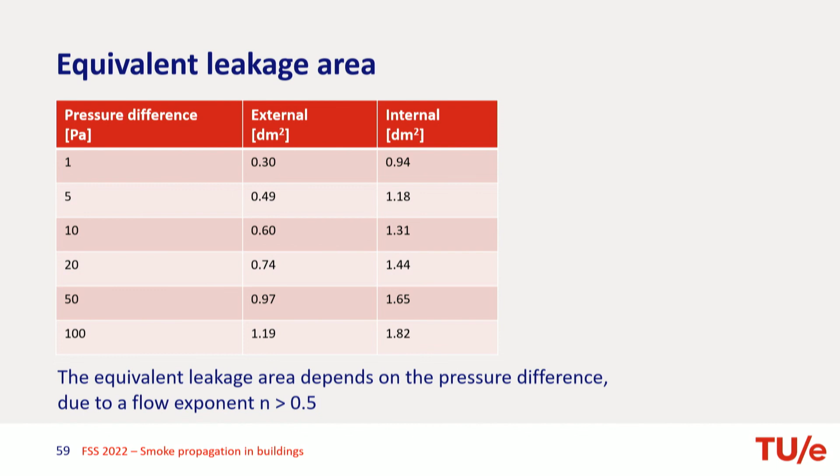Because these are the problems that we're facing now in modeling smoke propagation inside buildings. If you can do that in a more accurate or more realistic way, you would be very welcome. Any questions before we go to the drinks? Peter.

You say CFAST doesn't have the possibility to define small openings? Small linear openings? I think it does. Yeah, you can. I believe with one of the latest releases you can actually pre-specify a leakage area. Yeah, but an exponent, including an exponent? No, that's not including an exponent. I think it's still the same issue.

It's correct, you can give in a leakage area depending on a separation construction, or maybe it's for a separation as a total, for an apartment. Yeah, for an apartment that's total. But Contam, that's a different package - yeah, that certainly has it, that's a flow package. Yeah, and TRNFLOW certainly has it, but those are building physics packages, not specific for fire conditions. So, yeah.